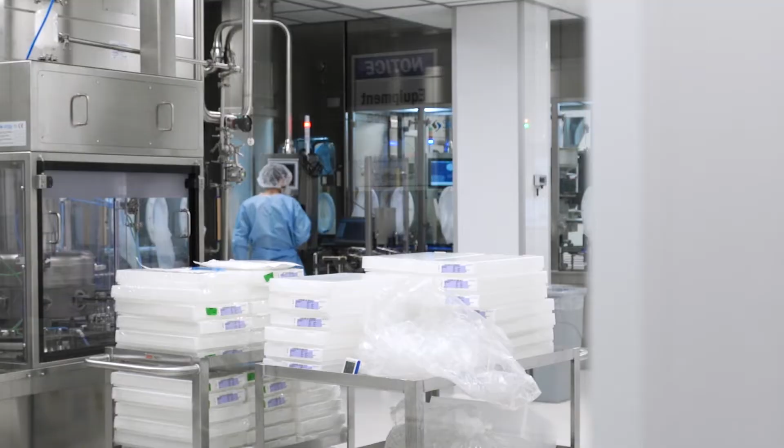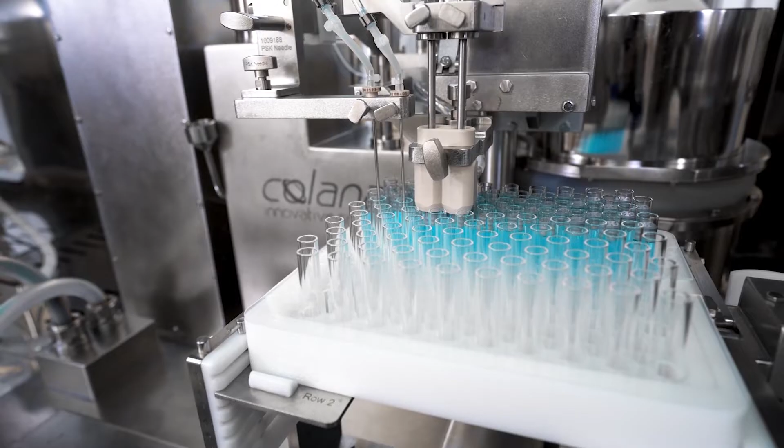So Berkshire Sterile Manufacturing was founded in 2014 by 3 individuals, all with 25 plus years of aseptic fill finish experience. And they wanted to build a brand new facility utilizing the latest innovations as it pertains to sterile manufacturing. And the way we did that was combining flex filling lines, so lines that can fill vials, syringes, and cartridges, and surrounding them with isolators for the best sterility assurance possible.

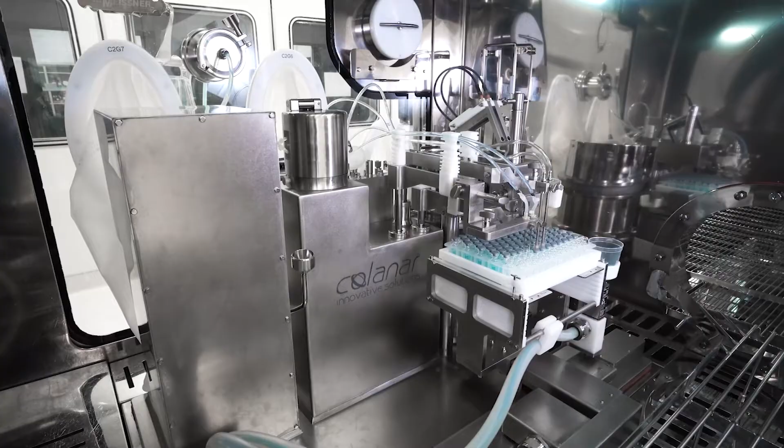Well, in March of 2016, we did our first GMP fill on behalf of a client. And at that time, isolator-based filling was brand new. And so we felt like we were bringing the industry forward by educating people on these new processes. And now the expectation here in 2022 is that people have isolator-based fill lines.

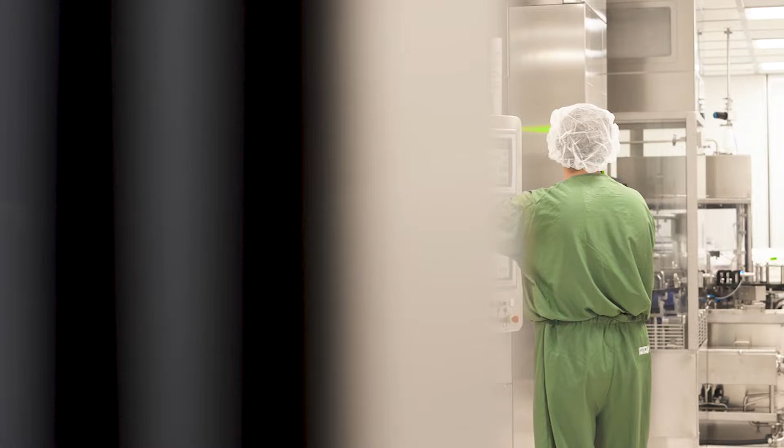The idea for the new fill line came about because we listened to our clients. And we are traditionally known to do smaller batches, and then they would have to switch to a larger CMO to accommodate their more commercial scale volumes. And so we didn't want them to have the headache of finding someone new to work with. We wanted to help them with those fills. And so we asked our team to design a line that would be able to accommodate larger batch sizes.

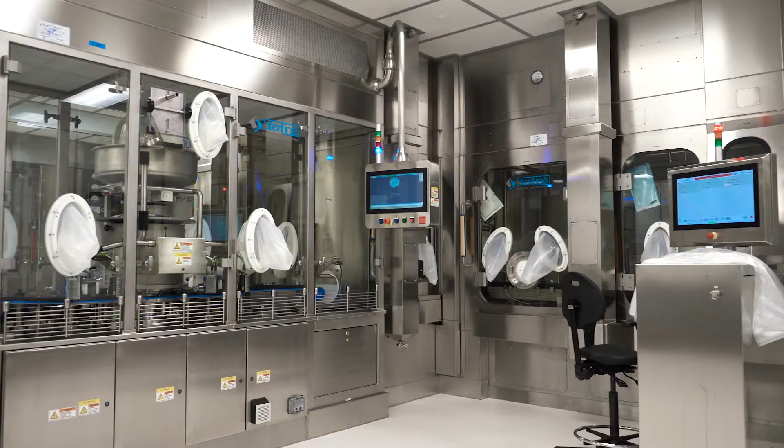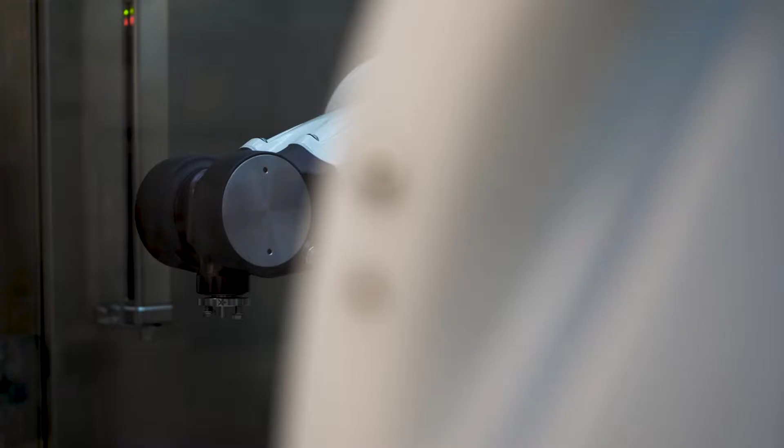So we have 2 existing filling lines at Berkshire Sterile, and one is a manual, one's a semi-automated. In order to really grow and service our existing clients, we decided that we needed something more robotic in nature and that could process more product through it. And that's when we started looking at, so what would be the ideal line? How could we build this line to give our clients the flexibility that they currently have, increase the sterility assurance that we're trying to increase every time we build a line, and be there for them for the future, for future growth.

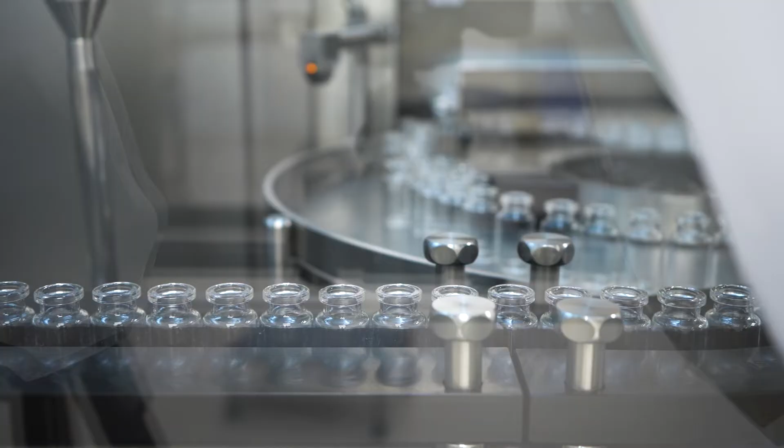It was interesting. We held a meeting with all the sales and marketing people in the summer of 2019, and we talked to them about if we were to install a new line, what are the capacities, what are the capabilities, what are the things that you would wish in this line that would make it easier for you to go out and sell. The business development team drafted a list of features and benefits that we wanted this line to have.

We wanted to have the flexibility to fill multiple containers. We wanted to have a continuous depyrogenation tunnel for bulk containers. We wanted to have the ability to bring RTU tubs in and have them decontaminated as they came into the isolator. We wanted it to be fully automated as well, so fully robotic with glove ports, so if we needed to make an adjustment, we could do that. And we wanted to have lyophilization capability that would enable us to have much larger lot sizes for commercial production.

And that's where we're like, oh, if we build this, why don't we make it so that we can add another lyo? So we have our 20,000 unit 20R vial lyo, and in the future we can easily add on to that isolator to add another lyo of the same size. So by thinking it through and looking at how we could be flexible and how we could grow into the future, this is what we came up with. It was certainly an, oh my God, how are we going to get all of that into a line? We all thought it was impossible to get everything that we had wished for on that list.

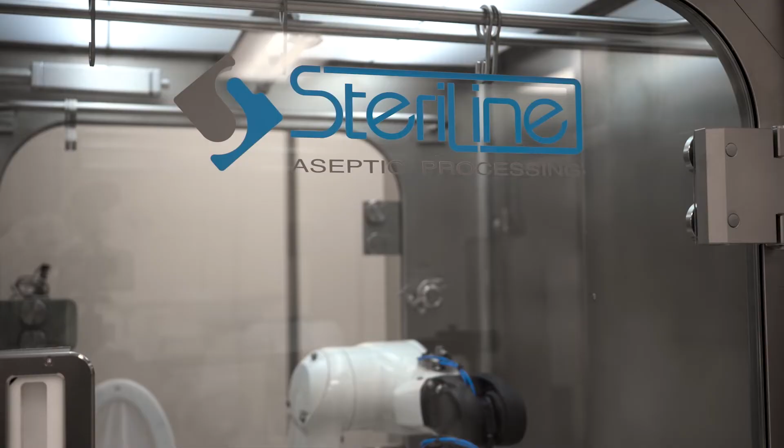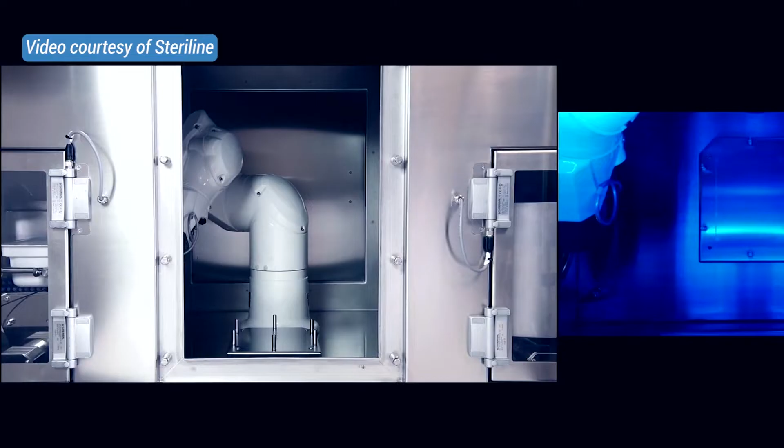Amazingly, we were able to work with 5 different suppliers and put together a really state-of-the-art isolator filling system that met all of our requirements, including being able to fill bulk and RTU vials from 2 through 100R, being able to fill and stopper cartridges and syringes. We increased the lyo capacity dramatically over our existing lyo. We can do up to 50,000 units in a single lyo run. And we also added features that really improve the sterility assurance level of this isolator versus the more traditional ones that are out there currently. This is the greatest thing that we've ever created, and I'm going to tell you how we did it.

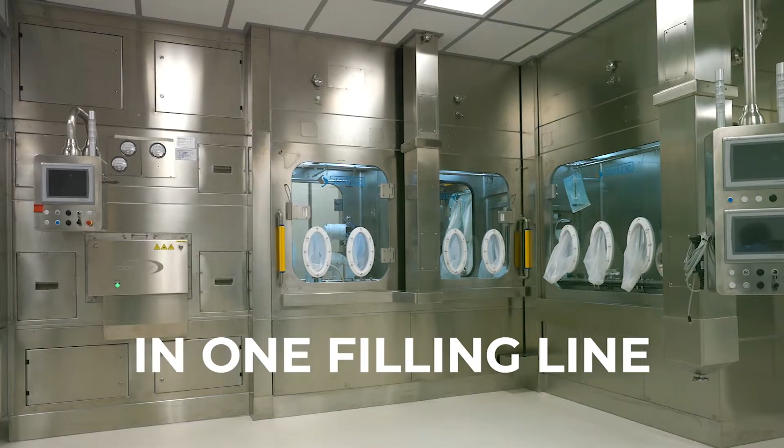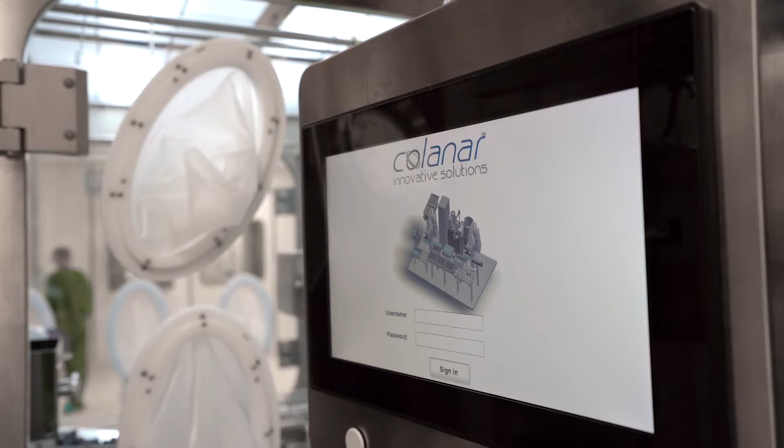So we have suppliers that we've used in the past, and we wanted to stick with IMA for the lyo, Colanar for the filler, Genesis for the capper. We actually have a new supplier, Claranor, for the pulse light sterilization, and of course Steriline for the overall isolator construction. Once we narrowed down who the suppliers were going to be, we wanted to focus on three things with this line. That is flexibility, automation, and quality.

Well, there were a lot of challenges involving the design and creation of this new line. There is such a wide range of components we work with, and some components that we may work with in the future, we don't even know yet. A lot of the challenges had to do with how to achieve both flexibility and speed in a sterile aseptic environment. So that included, how do you process both bulk and RTU presented containers? How do you move those containers through an aseptic environment to different machines, whether it be a lyophilizer or a capping machine? And how do you maintain that process at speed?

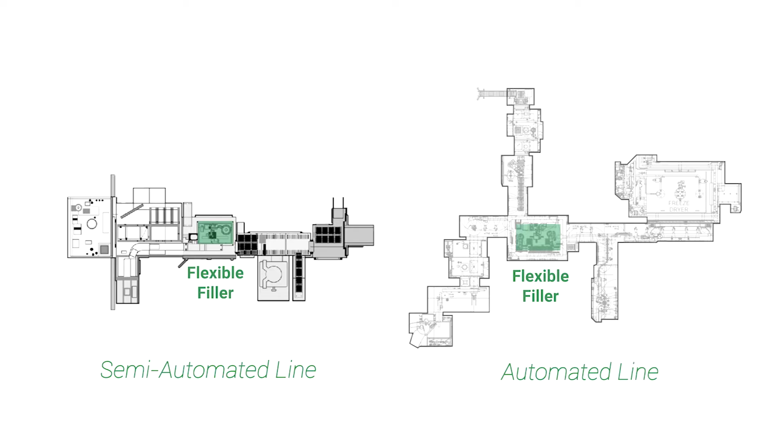Well, our main approach to solving some of those challenges was using what we learned through our semi-automated line to help us decide how we should design our automated line. For example, the center of our line is based around a flexible filler that's capable of filling vials, cartridges, and syringes. We also have two separate introduction pathways, one for RTU containers and one for bulk containers. And we have a separate designated diverting isolator, which is capable of sending containers either to the lyophilizer machine or directly to the capper machine.

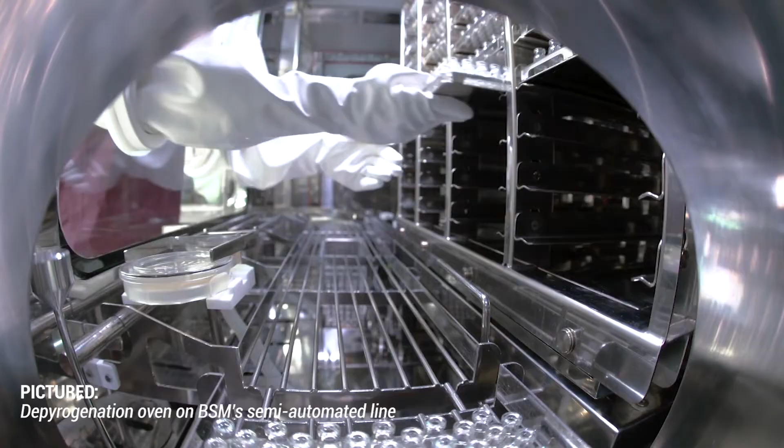There were some processes in our semi-automated line that weren't necessarily going to be applicable to our new automatic line. For example, the depyrogenation process in our semi-automated line is a batch process. A depyrogenation oven is a batch process. And so whenever you talk about batches, you talk about starting and stopping, sort of like a traffic jam on the highway. When you put in a continuous oven or tunnel, you eliminate that starting and stopping. So although there is a delay at the beginning of the manufacturing process, once it starts, it is continuous until it ends. And one of the natural byproducts of that is that everything that happens is consistent in the line without that starting and stopping. And so we can also call this a quality improvement as well as a speed improvement.

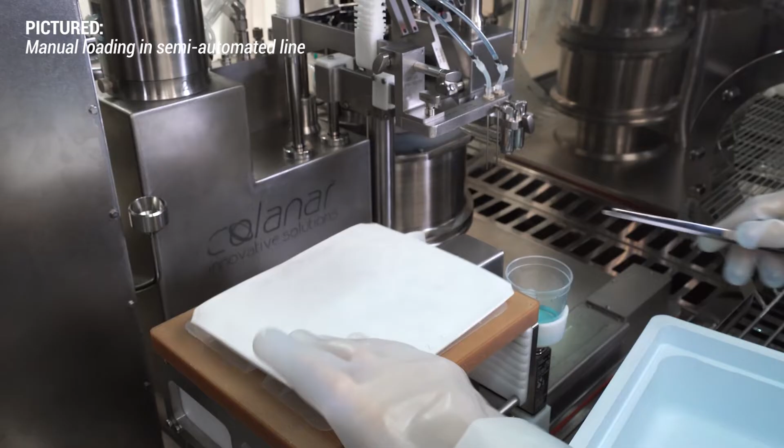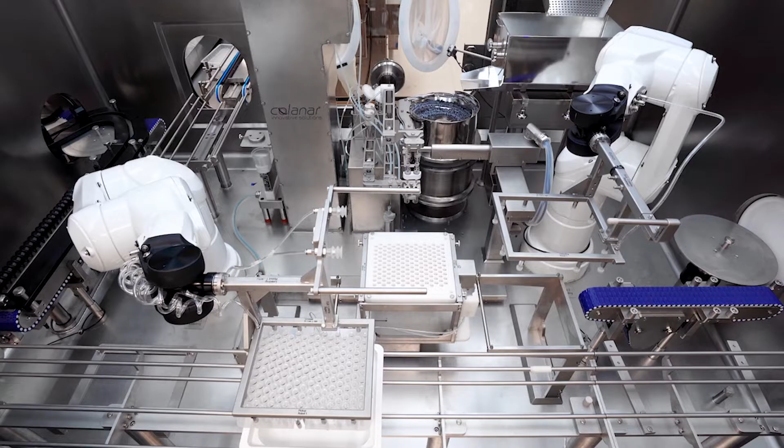Another design difference included the automatic loading and unloading of some of the machines we had to use in the aseptic space, including the filling system and the lyophilization machine. In the semi-automated line, that process is entirely manual, performed by operators using glove ports. In the automated line, that had to be automated. For the filler, we had to use robotic arms to load an XY filling table with either bulk or nested containers. In the case of the lyophilization machine, we're fortunate that the vendor we selected, IMA, had a solution designed already for an automated loading and unloading system.

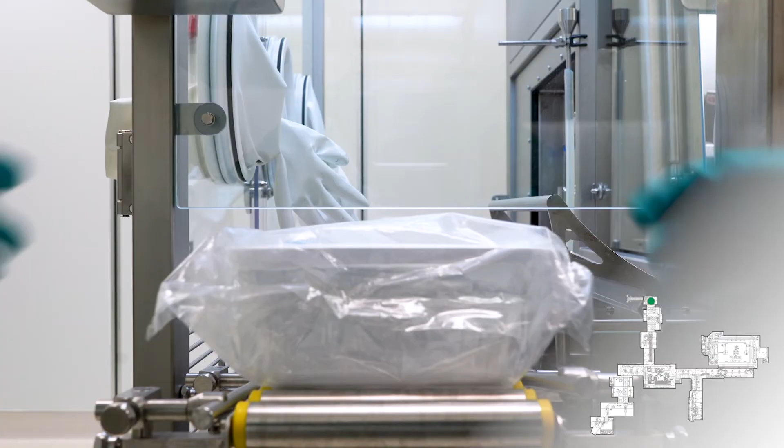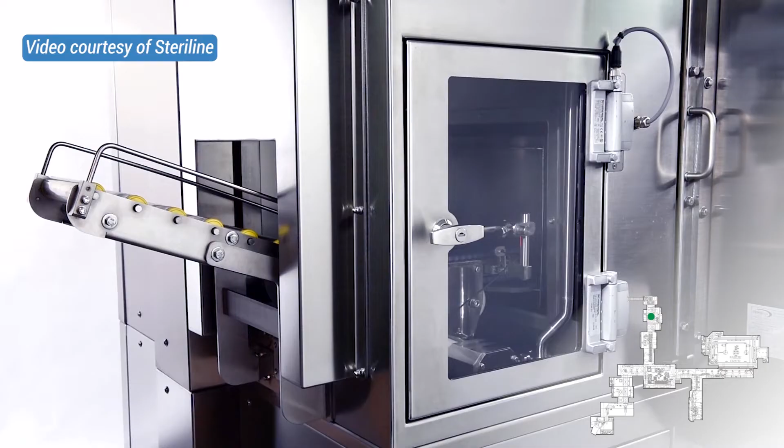At this point, BSM nailed down a design that could process all container types and sizes. So, RTU containers go into a no-touch transfer device where the first outer wrapping is removed, and it's then put into a pulse light decon isolator where it's hit with UV light to do surface decontamination. And then it's pushed into another isolator that has a robot that delids and delines it. And then it's carried down to the filling isolator where it's put on our filler.

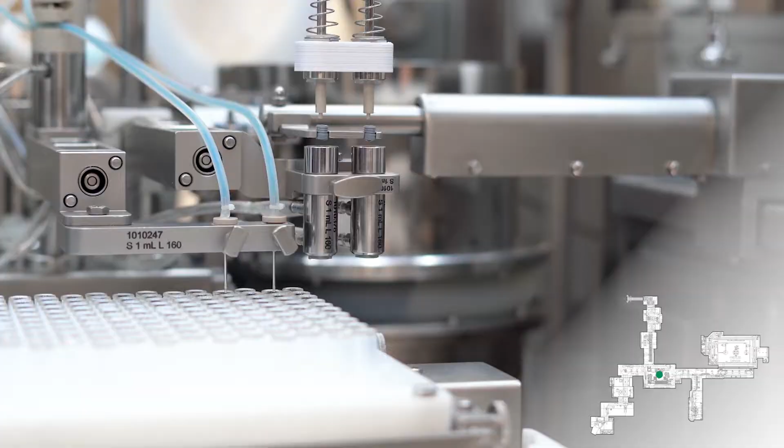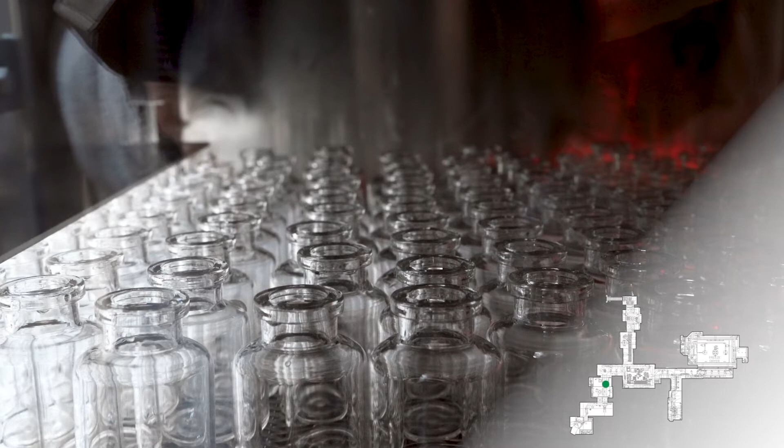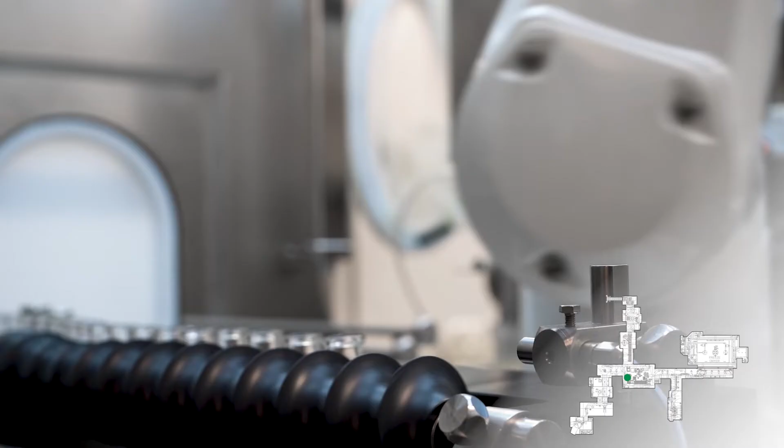And for bulk vials, the operator brings the vials to the washer. The vials are washed and then fed into the depyrogenation tunnel. It exits the depyrogenation tunnel into another isolator, which is an accumulation isolator, which is on a turntable. And those then exit into the filling isolator, where a robot takes the vials and places them into a nested configuration and where they're filled.

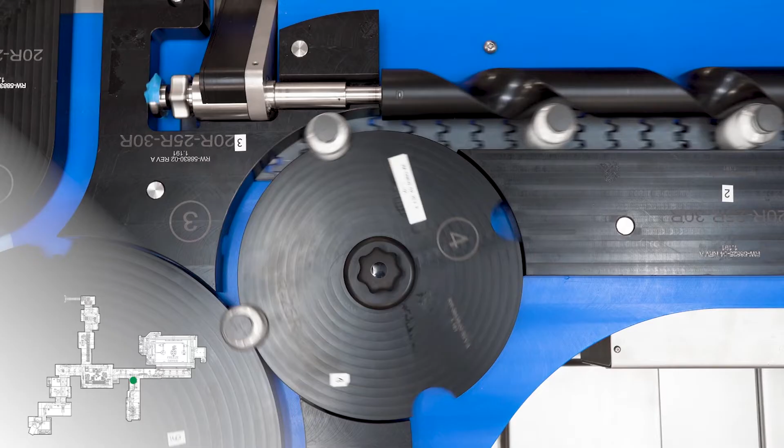How do the containers exit the line? For syringes and cartridges, after they're filled and stoppered, they exit out of the filling isolator through wraps. Now for liquid-filled vials, the robot denests the vials into basically a conveyor system, which brings them into a diverting isolator, where they're then taken into the capper, a Genesis capper, and they'll be examined for raised stopper detection, as well as the crimp quality, and that's an online reject processing, and then it comes out fully capped into a collection area.

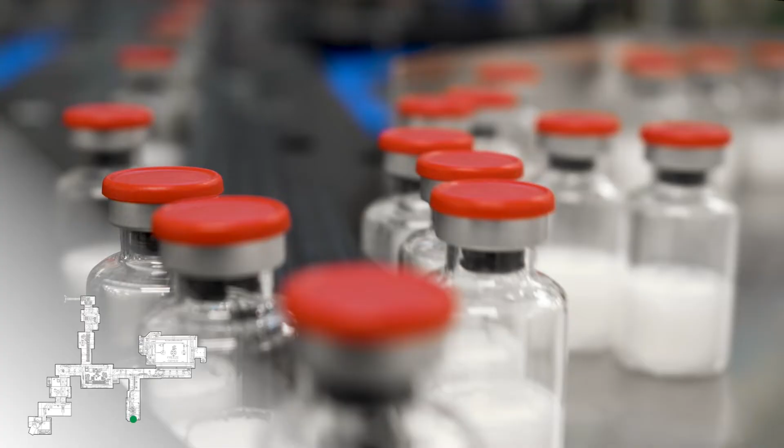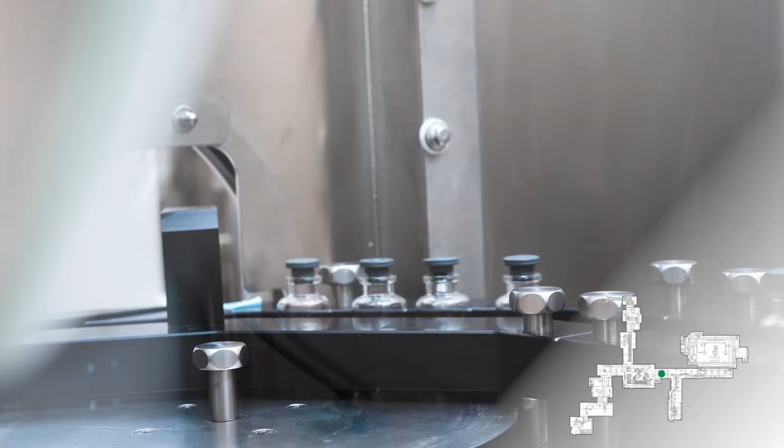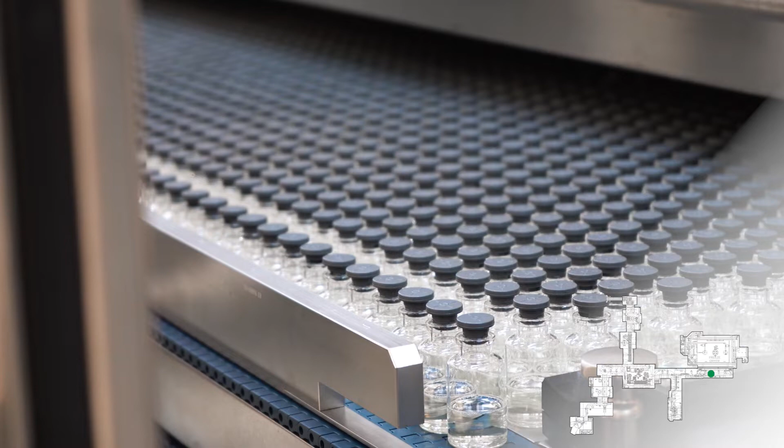Vials that are filled and need to go to the lyophilizer go through the diverter isolator, and down to the isolator that's in front of our lyo, and it's put onto an auto loader and loaded into the lyo. The lyophilizer is then started, and then after completion, there's an auto unload, and the vials come back out.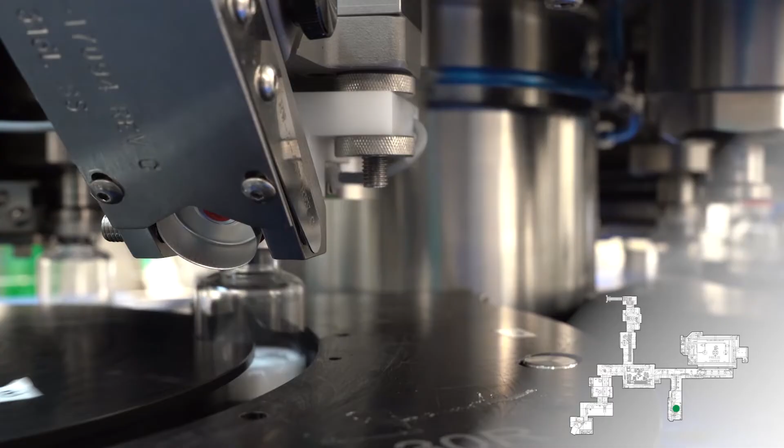They go back down into the diverter isolator, into the RABS Genesis capper, where they again look for raised stopper detection and quality of crimp. That gets kicked out automatically, and the vial ends up in a collection area.

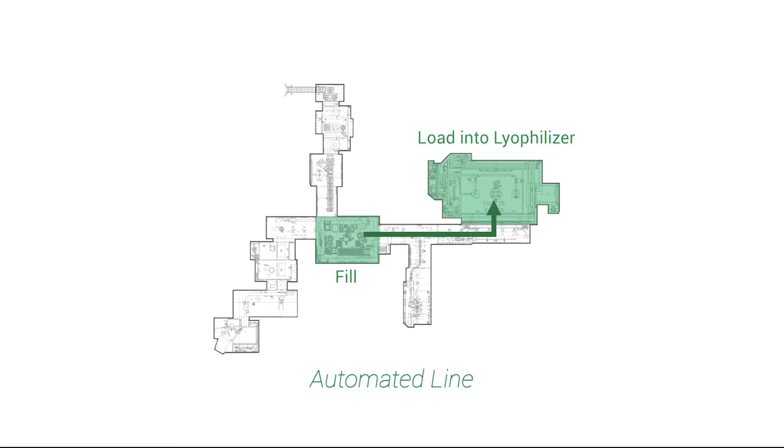So a lyo cycle can be a multi-day affair. Could a lyophilizer put this line out of commission? So you can perform liquid fills while operating the lyo or doing a lyo cycle for a client. How that works is that you would do your liquid fill and then put your vials in the lyo, and then you would break it down. The lyo is running; it's like its own separate room. You would clean it. You would VHP the areas that you needed VHP'd for your production.

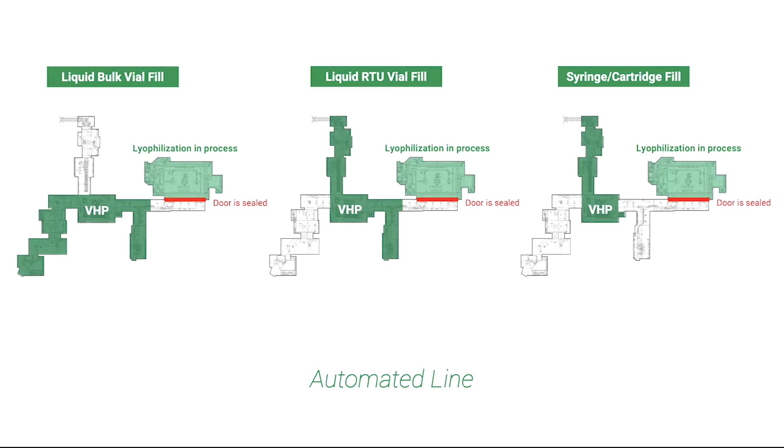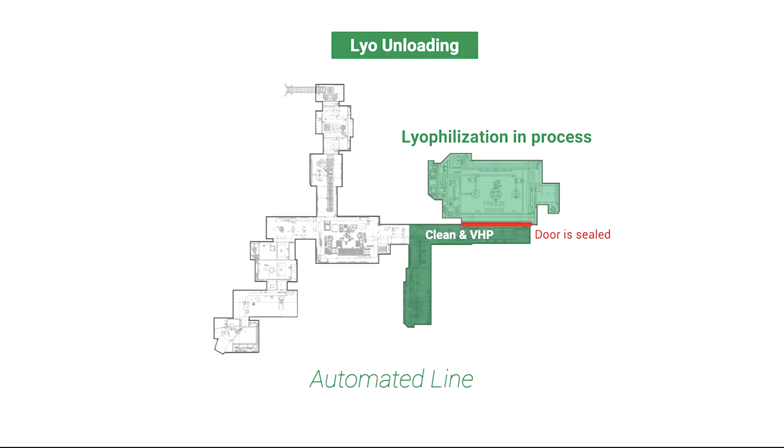Run that. And when you bring your vials out, you would operate that as a separate fill as well, where you would set it up. You'd VHP it. You'd bring the vials out. They go into the diverting isolator and come out of the capper. As long as that product that's on the line leaves the line to a separate space, to a separate room, then technically we can clean the line, clear it, and start again. While a multi-day lyophilization cycle is underway, we're able to use the rest of the line to produce batches without any risk of cross-contamination.

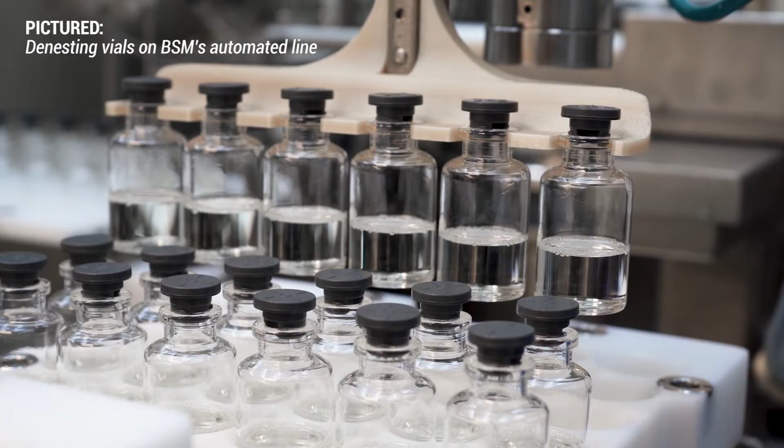Why are we going fully automated with this line? Let's face it, we've all had to come to terms with the fact that humans are not as consistent as machines are. By eliminating the operator intervention, that was a speed increase in and of itself. We wanted automation because we wanted to be able to produce larger batch sizes for our clients' needs. What we did was leverage robotic technology quite a bit in order to automate the line.

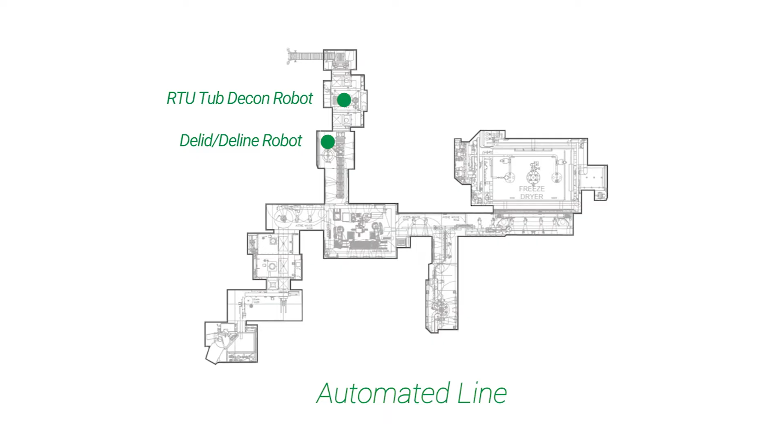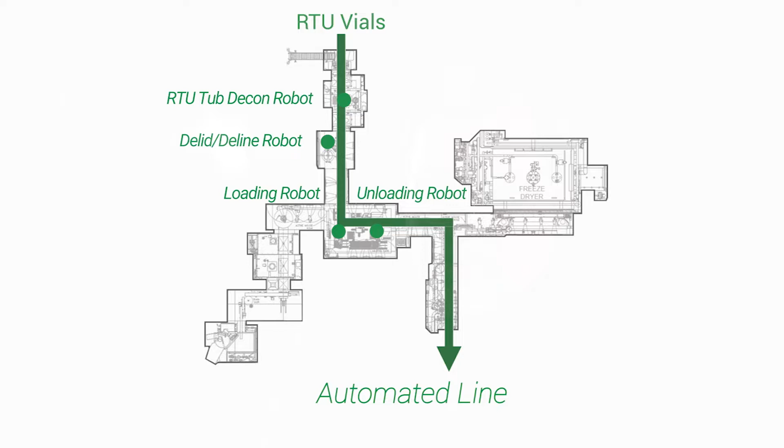And so what we have now is 2 robotic arms on the RTU side of the line and an additional 2 on the bulk side. So whenever we run bulk product, it sees the 2 robots in the filling chamber. And when we run RTUs, it sees all 4 robots, 2 prior to the filling chamber and then the 2 in the chamber. And then the rest is handled via conveyors and mouse holes and mouse hole doors. We can fill vials and syringes and cartridges repeatedly with exacting standards where we could not do that with humans.

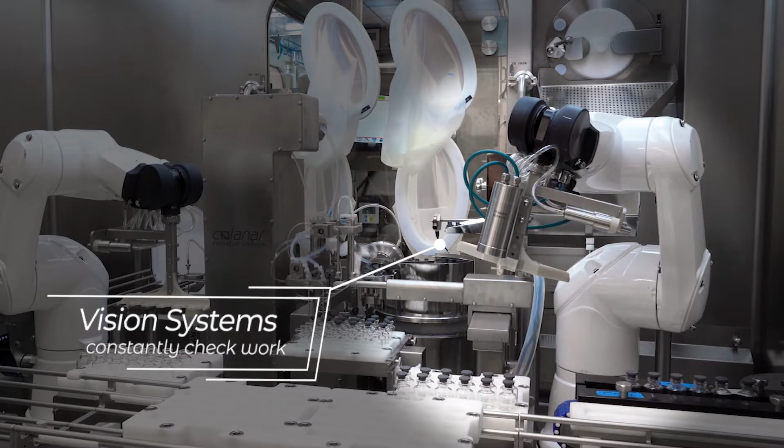The controller for the line can see where all the vials are all the time and what's going on, and in conjunction with the robots, they keep the flow going. So it's literally, we push the glass in one end, provide the product to the filler, and then wait for the material to come out the capper on the other side. It really doesn't get much more automated than that.

A major challenge was to figure out how to use the same filling system to process both bulk vials, RTU vials, and other RTU containers like syringes and cartridges, all with a single filler. And how they did that was they relied on robots. They put 2 robotic arms in the filling chamber to replace operators, and one of them was a loading robot and the other one is an unloading robot. The loading robot would place a nest of containers onto the filling line.

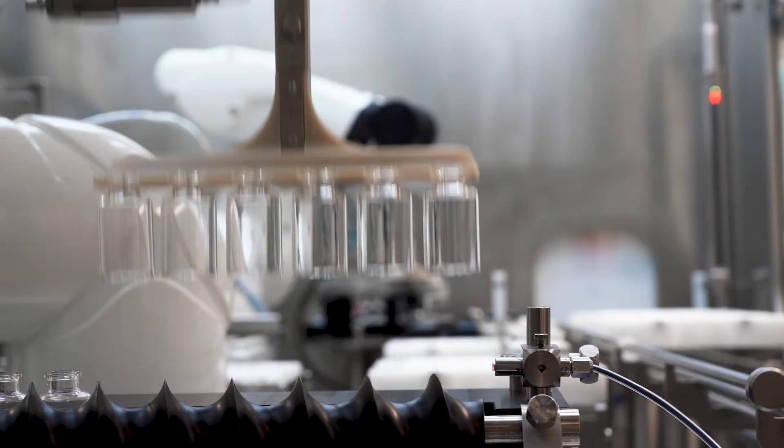Now, if the nest came from an RTU bin, then that would be easy enough. But if they were working with bulk vials, then the robot would load the bulk vials into pre-sterilized nests, and then it would place that nest onto the filler. The unloading robot would remove the nest, put it back into its RTU bin, and then move it out into an exit RABS if it's a cartridge or a syringe.

If the container is a vial, whether it's RTU or it's bulk, the unloading robot will take the nest off the filler, de-nest all of the vials onto a conveyor belt, and then either place the nest back into the RTU bin, if it's an RTU vial, and move those out of the filling chamber, or take the pre-sterilized nest for bulk vials and move it back towards the loading robot.

So for bulk vials, they would have several pre-sterilized nests that would just circulate. And this is how they replaced operators in a filling line with just 2 robots. Our next challenge was to overcome the possible failure modes that we would see due to the increased complexity from remaining flexible and automated at the same time.

We have raised stopper detection at 2 different locations. We have one before it goes into the lyo to make sure that the stopper is at the correct height. We also have one at the capper to make sure that the stopper's been pushed down all the way before it's capped. So we have raised stopper detection.

If a vial is missing, let's say when the robot picks up the vials and loads them into the tray, if there's one missing, it can see that, and then it will pick up a single vial and place it in that open slot. So we don't end up filling an empty slot and then putting a stopper on top of it.

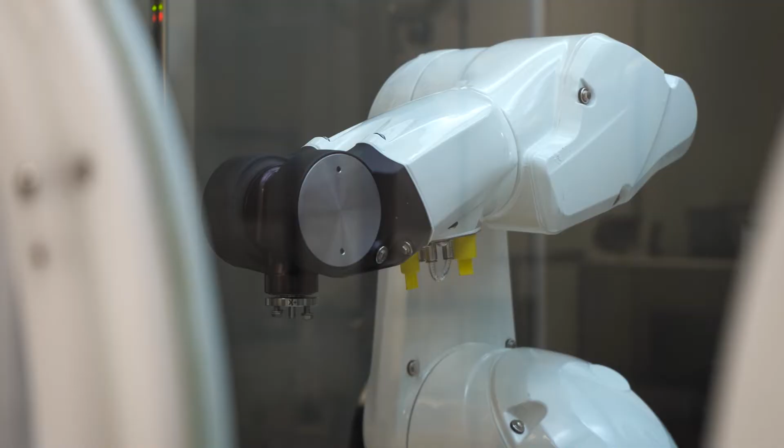Some people are saying that gloveless isolators are better than gloved isolators, but we took the approach that we wanted to have an operatorless isolator. It would have glove ports, so if it became necessary to save a fill, if there was a problem, operators could use the glove ports to perform some operations inside.

But under normal operating circumstances, the gloves would never have to be used because the robotics and the automation that we put into the system don't routinely require any operators to perform any tasks in the isolator. So what we again like to say is that we are operatorless, not gloveless. By removing people, you're removing that additional risk.

The Steriline automated filler has been designed with quality first and foremost in mind. This is an isolator technology. Having it be an automated line increases its sterility assurance in that we are removing humans from the system, so we don't have to rely on manipulations or anything of that nature. The robots do it for us. We also have added a new technology.

BSM was on the hunt to enhance sterility assurance for RTU tubs entering the filling line. They evaluated several different technologies, including e-beam sterilization. But it was very large, it was expensive, and left byproducts on the surfaces of the containers. They looked at flash steam sterilization, but that wasn't advanced enough for our commercial use. They also looked at sterilizing gases like VHP, but that raised product concerns and some byproduct concerns.

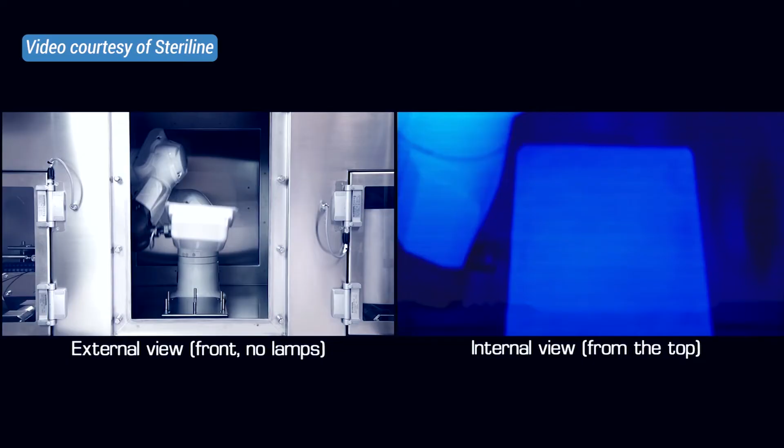Pulse light has been used in many other industries, food packaging and other things like that, and now we're adding it into our filling line for some extra sterility assurance. There is a robot inside the decontamination chamber, and it picks up the RTU tub, presents each side to the pulse UV light, and then there are several flashes that sanitize the outside of the container. And then it'll put it back down, pick it up from another position and sanitize all of the surfaces again. And then it essentially just goes into the filling chamber from there.

With this new technology for decontamination, it's going to be completely automated. We'll be providing at least a 4-log reduction in bacterial counts as stated through our validation. In man-based versus automated, you have parameters that are validated and you can count on it every single time. You have variables when you have a human element inputted into a filling system.

Hi, my name is Stephen Kinney. I'm the Associate Director of Validation here at Berkshire Sterile Manufacturing. I'm going to give you a tour of our new fully autonomous flexible filling line. We're going to start with bulk vial introduction.

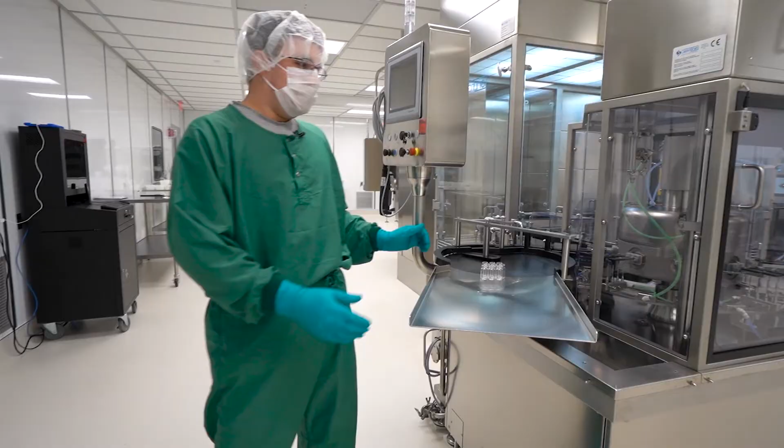Bulk vials are placed on this in-feed table here, and through a rotating table are introduced to our vial washing machine, which uses a combination of recirculated water and virgin WFI to clean the vials of all contaminants.

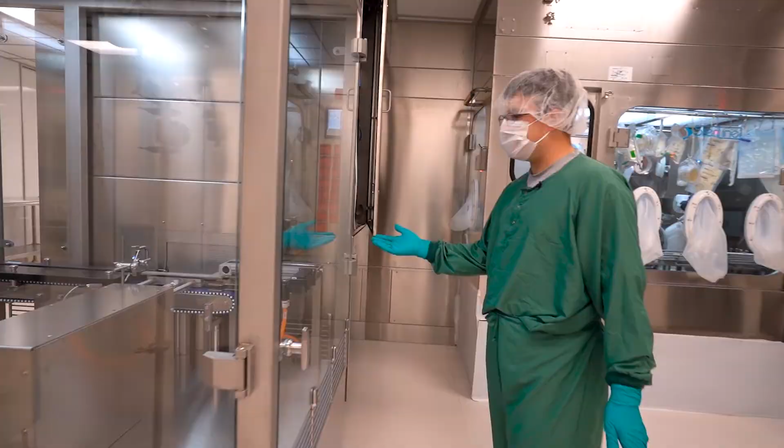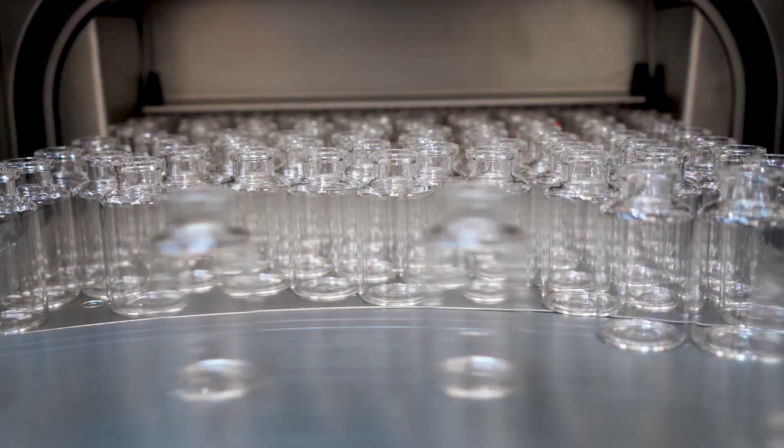After vial washing, vials are automatically routed to a depyrogenation tunnel, which you see in front of you here, protected by a laminar airflow unit. Inside of the depyrogenation tunnel, vials are sterilized with dry heat to achieve a 3-log reduction in endotoxin.

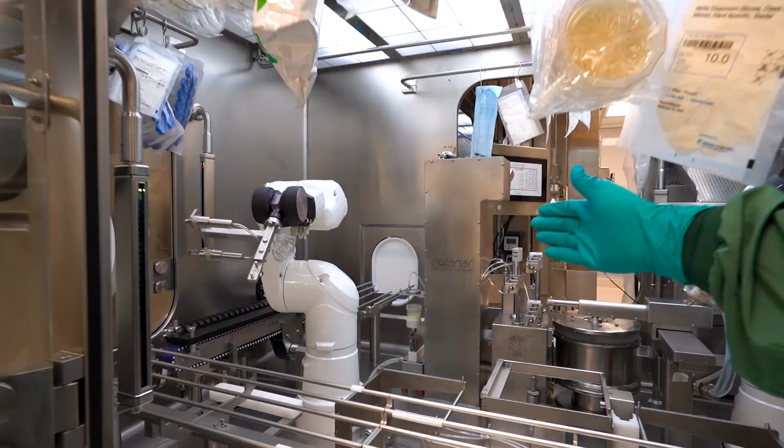After depyrogenation, vials are automatically fed into our filling chamber, which you see here. Bulk vials are fed in here along the left-hand side of the chamber into an in-feed scroll, where they're picked up by a loading robot and placed onto an XY table. The XY table is used by the filling system to fill and stopper vials.

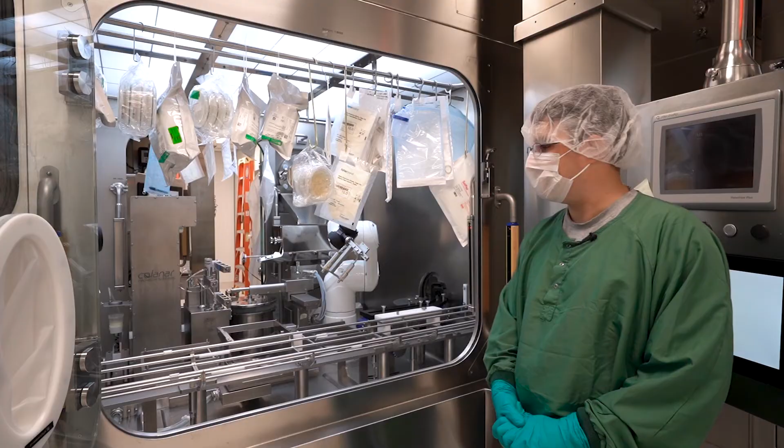It's a dual-headed filling system capable of using both peristaltic and piston pumps and applying both lyo and serum stoppers. An unloading robot then takes the vials after they're filled and places them on an exit belt. Next, we'll look at how RTU vials and containers are introduced.

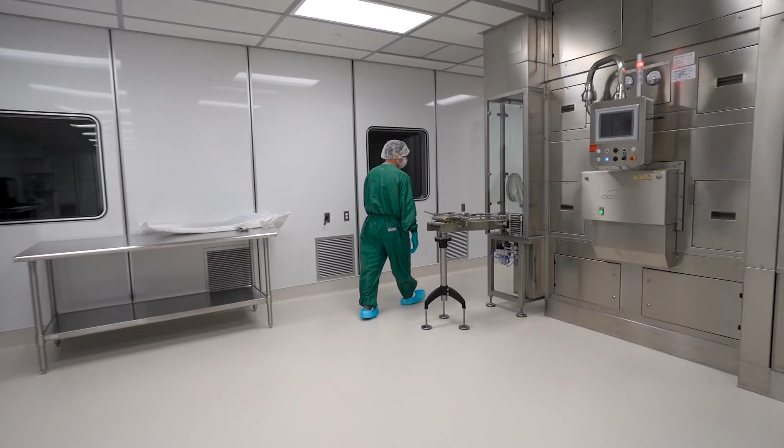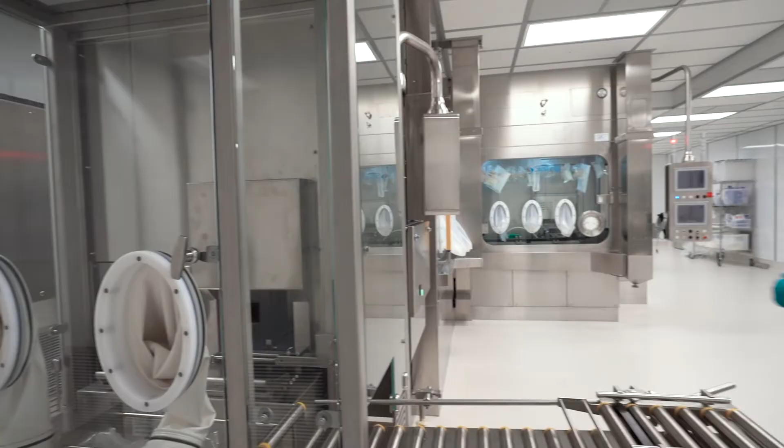RTU tubs are placed on this roller and handled manually by an operator using an automated blade to cut the bag and push the tubs out of the bag using a no-touch transfer method. The tubs are then loaded into a pulsed light decontamination system. The pulsed light decontamination system uses pulses of UV light to decontaminate each face and side of the RTU tubs.

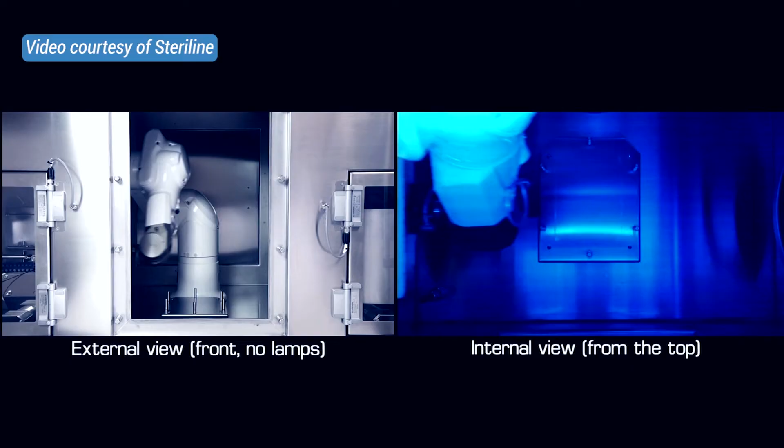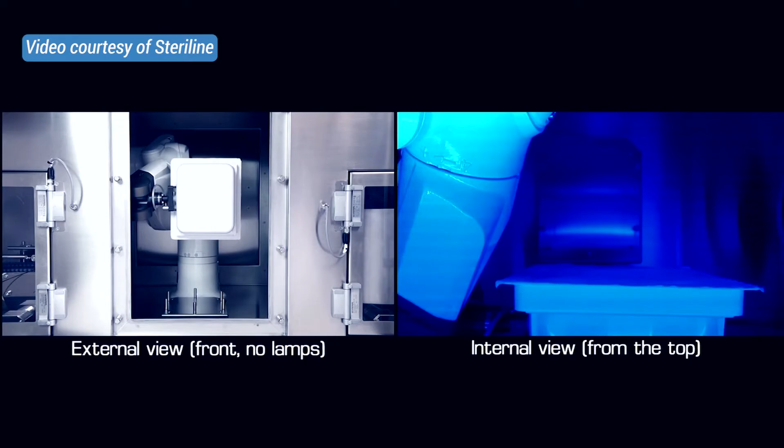Inside of this chamber, which is sealed from light, a robotic arm picks up and faces each side of the tub to a set of UV lamps. After decontamination of the exterior, the tubs are brought into the delid and deliner isolator, where a robot removes the RTU lid and liner before pushing it into the filling chamber, which you've seen before.

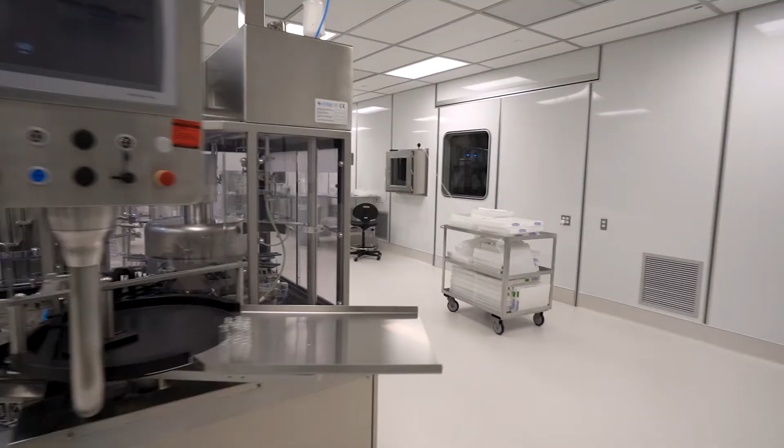RTU tubs make their way in through the rear of the filling chamber, and the nest is picked up by the loading robot and placed directly onto the XY table. The filling process performs the same way on the XY table with vials, syringes, and cartridges in a nested format.

Syringes and cartridges are picked up inside of their nest by the unloading robot and sent directly out from the filling chamber onto this unloading platform that you see to my right. Vials from both RTU and bulk lines will be placed on this exit feed belt here to be routed into our positive diverting system to either the lyophilizer or the capper.

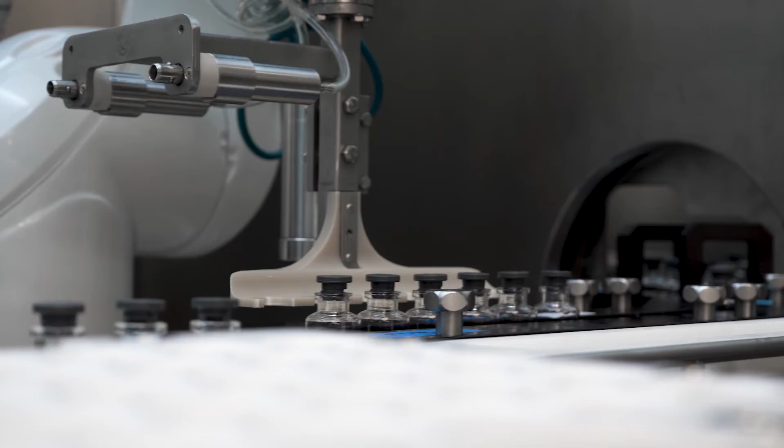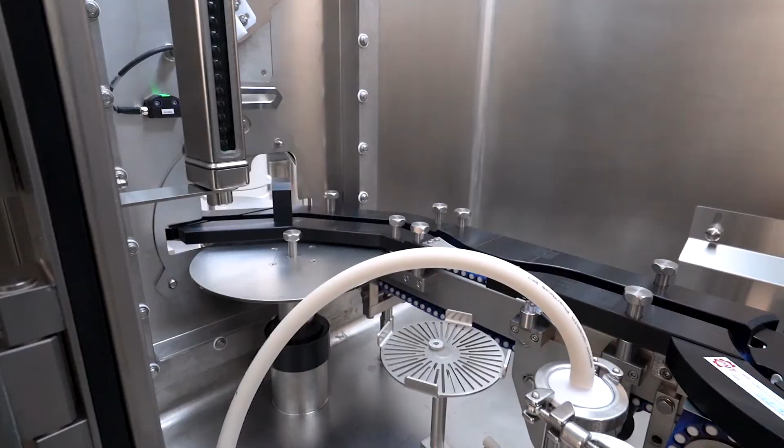The positive diverting system is a three-way diverting system that includes lyo stopper detection and serum stopper detection and rejection. Vials are routed here either directly to the lyophilizer or to the capper. Vials will also be routed from the lyophilizer to the capper post-lyophilization.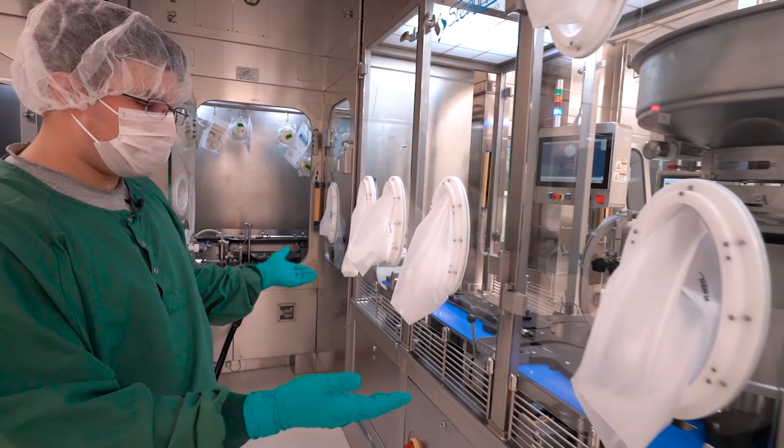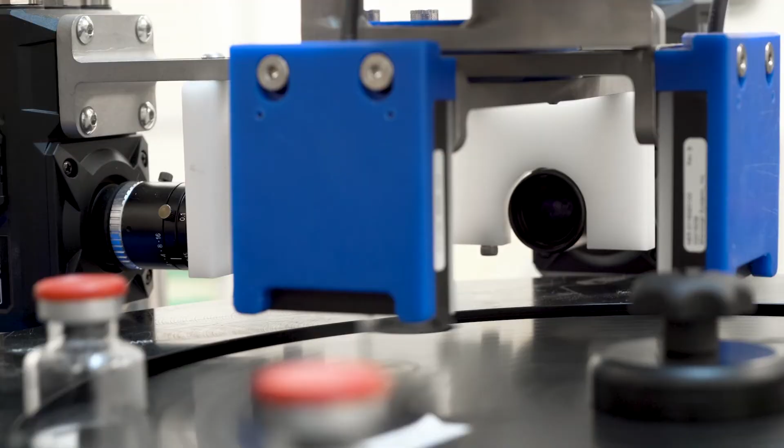Vial capping occurs here in our Genesis RW capping system, which includes pre and post-cap vision systems for raised stopper detection and rejection, as well as crimp compliance. Completed vials are fed out onto this rotating table where they're collected in trays by the operator.

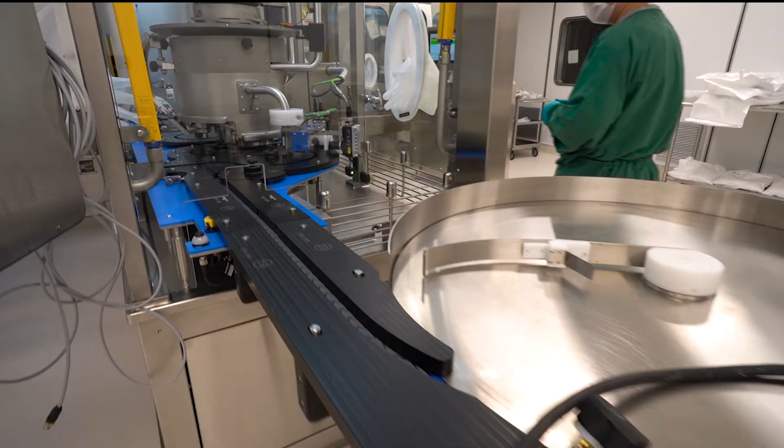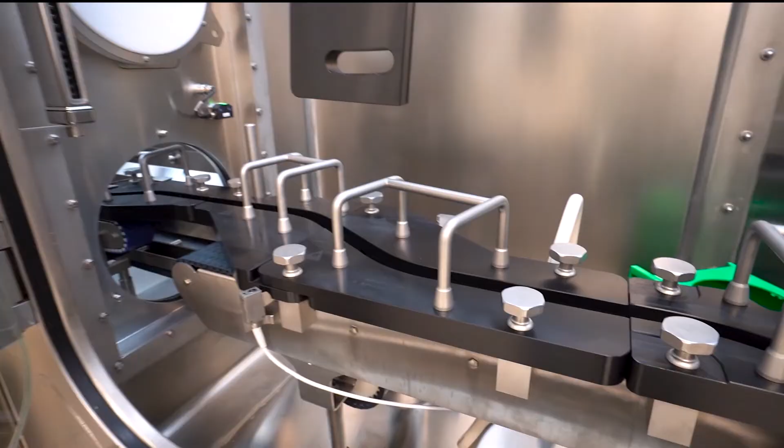The lyophilization features an automatic loading and unloading system for the loading of vials of sizes from 2R up to 30R.

This sterile automated filling line is the culmination of over 3 years of work by Berkshire Sterile Manufacturing and its employees, and I'm proud today to present it to you in its entirety. This concludes the tour. I hope you enjoyed it.

I think auditors will like the innovation that is state-of-the-art equipment. It shows growth, not just for BSM as a company, but overall in the pharmaceutical industry. Everything's unique about this new filling line. So prior to 2014, really flex filling wasn't a thing. This line offers robotic filling, fully robotic.

This line offers flexibility in terms of bulk and RTU. It gives you high lyo capacity. It gives you the ability to add more lyo capacity. So there's a lot of uniqueness to this line. Well, people are slow to adopt new technologies in this industry.

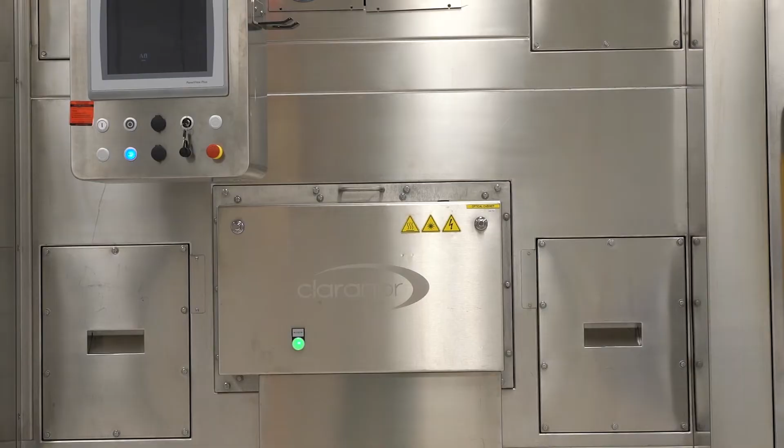I think that's one place that BSM excels, in that we take risks and we implement new technologies, and we're not following other people who have proven them out. So I do think this is going to change the industry standard for small scale fillers. We have put in some very unique features that really improve the sterility assurance level.

We've removed operators pretty much from the filling operations. We've put in a very positive decontamination step for ready-to-use containers that you typically don't see today on small volume fillers. It took us 2 to 3 years to build this line. We built it as a team with over 5 different suppliers, and now it's ready for business.